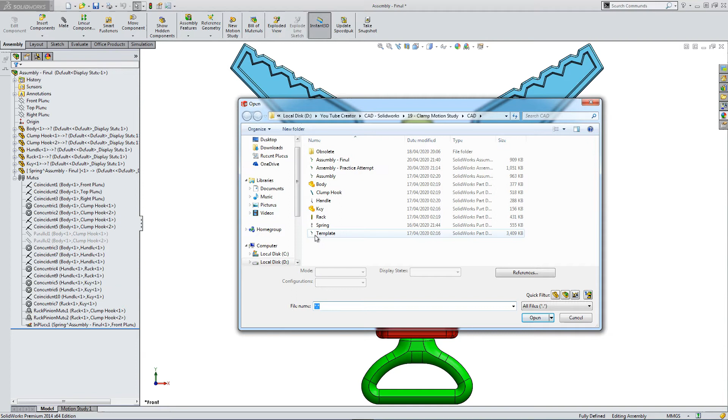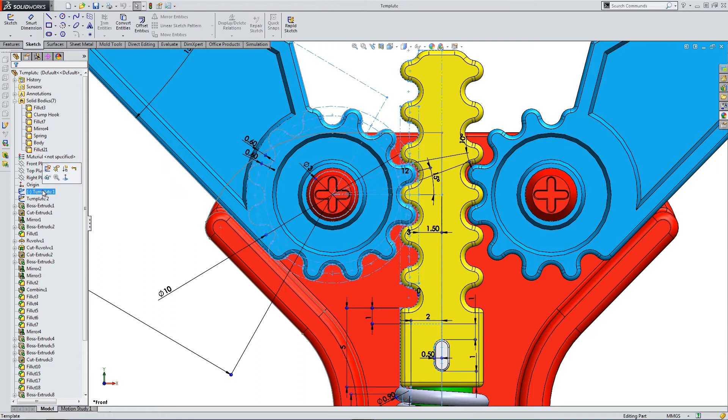So let's have a look at a master file we actually put together to model up the parts in the first place. So although this looks like an assembly, it is actually a part file full of solid bodies. Now to start the file, I put together a couple of template sketches. Now we can go straight into template sketch 1, and this is going to give us some information we need in our assembly to tell us how far to move our rack and pinion.

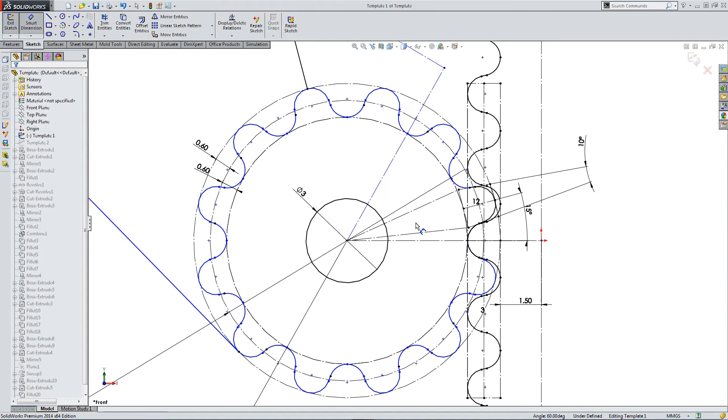So the gear is going to have to move 60 degrees, and with the 10mm diameter mid circle we're going to have to find the actual length of the arc to decide how far the rack is going to have to move. So let's just delete some geometry and let's ignore the fact that it's just going to over define it. This is okay, we're not particularly interested in that fact.

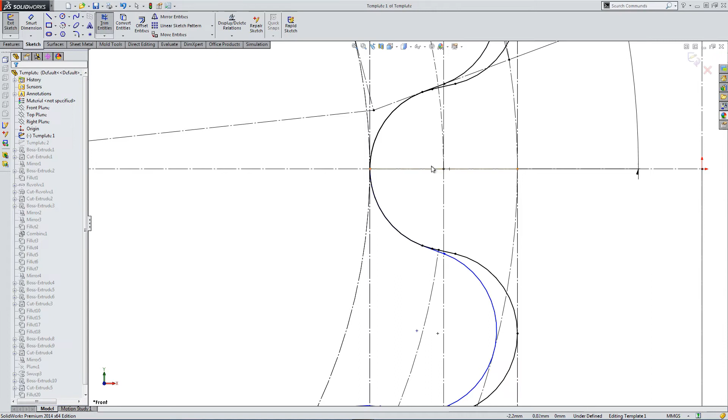So the arc that I'm interested in to tell me how far my rack is going to move, let's just go to evaluate and measure. Let's measure the length of the arc. So it confirms that the radius is 5mm, the angle is 60, and the arc length is 5.2359 millimeters. So let's copy this, and then we can come out. And that's all we wanted from our master model.

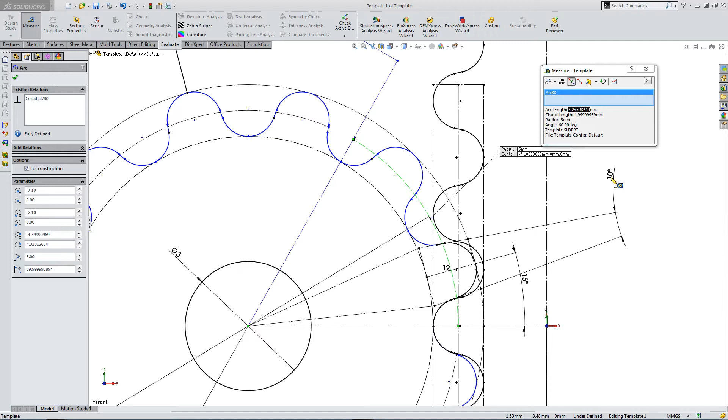Okay, so now we're back in the assembly. Actually, no, we're not. Let's close it. Okay, now we're back in our assembly of parts. So I want my rack to move by a set distance. I've just noticed that I have a mate that's still turned off. So let's just go. Yeah, let's turn the camera off because the camera angle changes can be quite annoying.

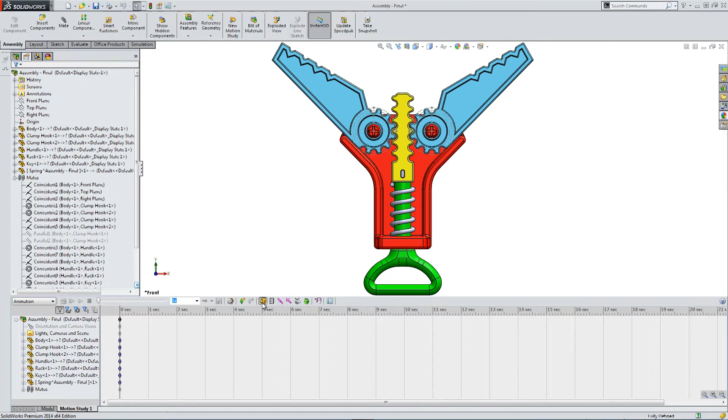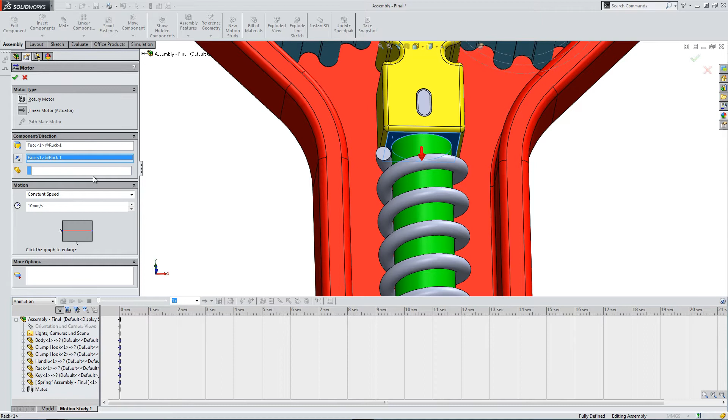So in the motor mate, I want a linear motor in my animation motion study. I'm going to pick my component. So I'm going to pick the base of this rack. And I want it to move down, but I want it to move at different sections of the animation. So I don't want to go with constant speed. I want to go with segments. So I'm going to segment when it moves down. So I have a series of positions. Let's add a row.

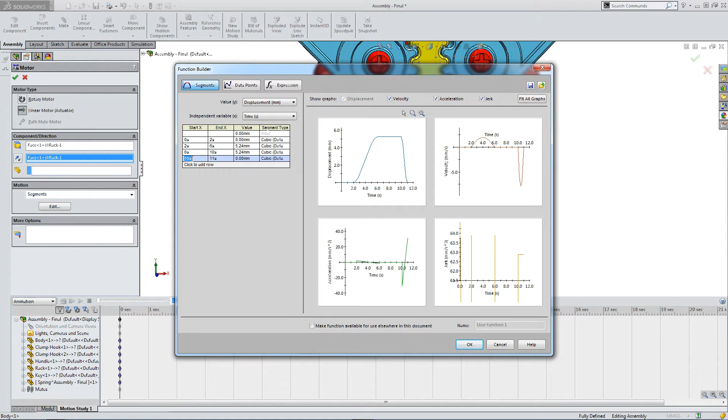So from 0 to 2 seconds, I don't want the part to move at all. Now let's add another row. Now from 2 to, let's say, 6 seconds, I want it to move, and let's go paste. So this is Control V, which will give me a paste from my model. 5.2359 we've added. Again, that's come from the master model. From 6 to 10, I want it to stay there. And then from 10 to 14 seconds, I want it to go back to its start position. So I'm going to put it back to 0.

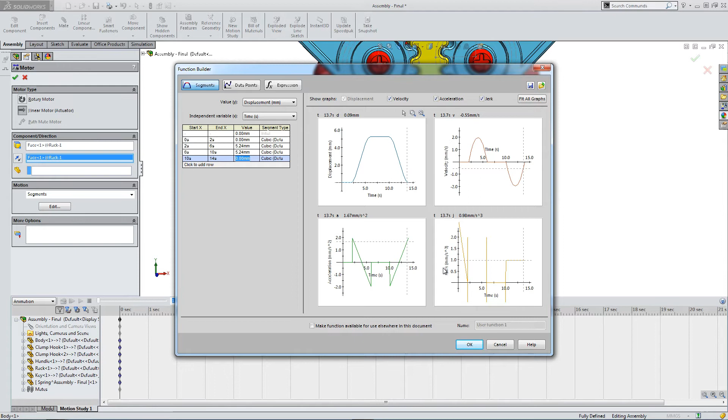So the graph showed the displacement. So there's no displacement until 2 seconds. And then it moves, and then by 14 it comes back to its start position. And the velocity, see, increasing velocity as it moves, and then at 10 seconds when it moves back, you can see a sudden increase in velocity. We also have acceleration and we've got jerk. We won't worry too much about these. So I'm happy with the motor. So I've basically set the motion for the rack.

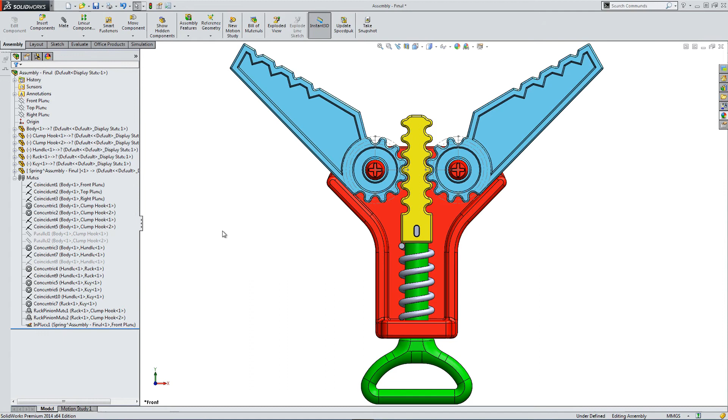I need to find this mate I was talking about earlier. So there is a mate. There you go. That's the backstop mate. So let's come out of the study and let's turn that mate off. Coincident 8. And that was just to align the geometry in a previous video. And I can see it's back on when we go back in the motion study, so let's turn it off here as well.

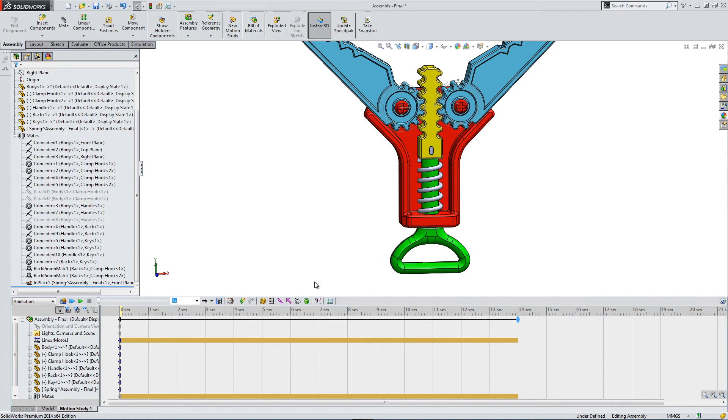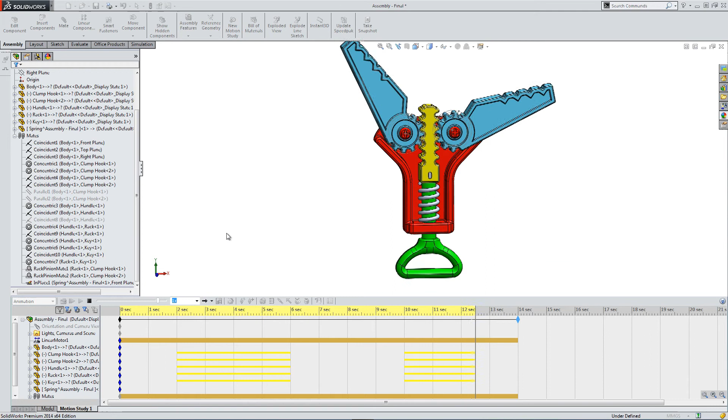Okay, so I want the timeline to be 14 seconds in line with what I've just put in for the motor. We're on animation as the type of study. Let's put in a standard view. And when we run the analysis, you can see everything's gone a little bit awry, but this was kind of expected when we put together the rack and pinion mate. So it is purely the rack and pinion mate that I need to look at.

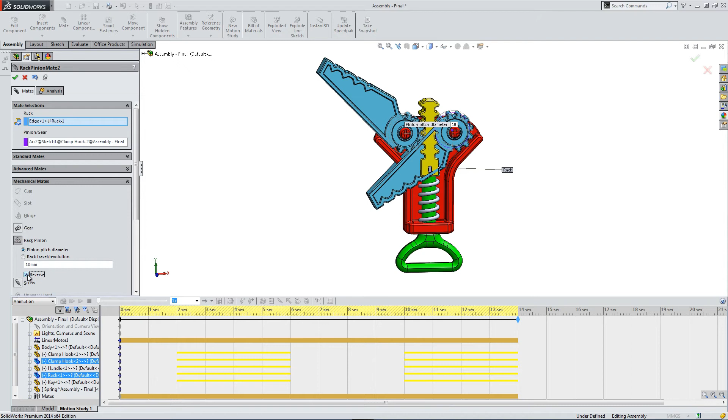So let's look at the second rack and pinion mate. Reversing it doesn't work, but selecting a different line from the rack might cure this part. So let's get rid of the edge. And let's use the same edge that we're referencing from the first rack and pinion. Let's see what that does.

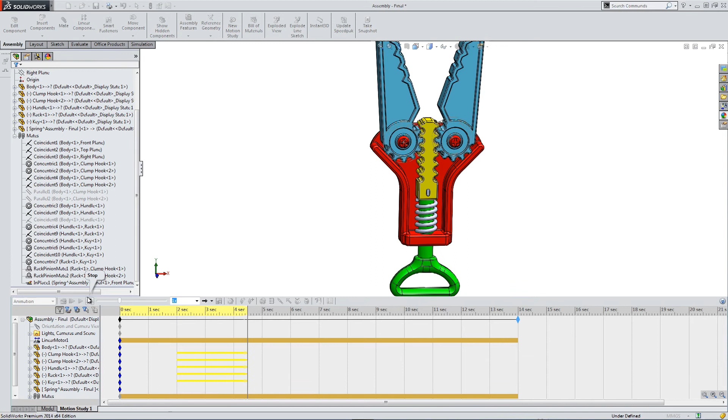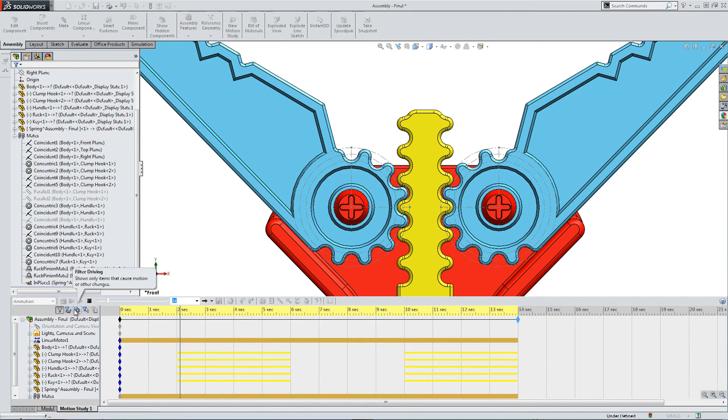So let's process the model. Looks promising, looks like everything's moving the way I want it to. 10 seconds it moves back. So between 10 and 14 it's moving back. Okay, so let's get a better view of what we've put together here. And I've got the gears and everything moving together. And then from 10 seconds moving back out. Brilliant. Okay, I think that's working for me.

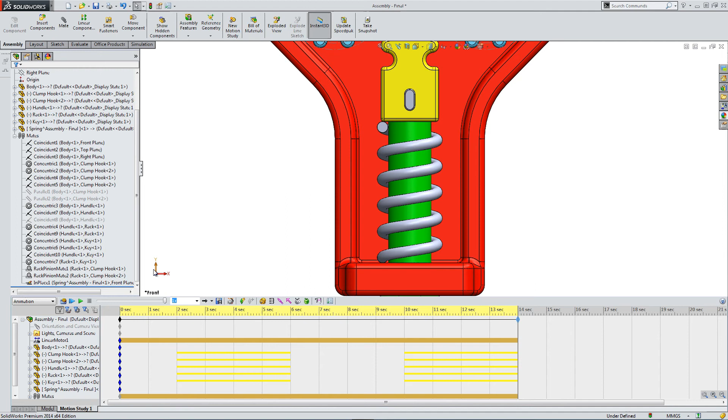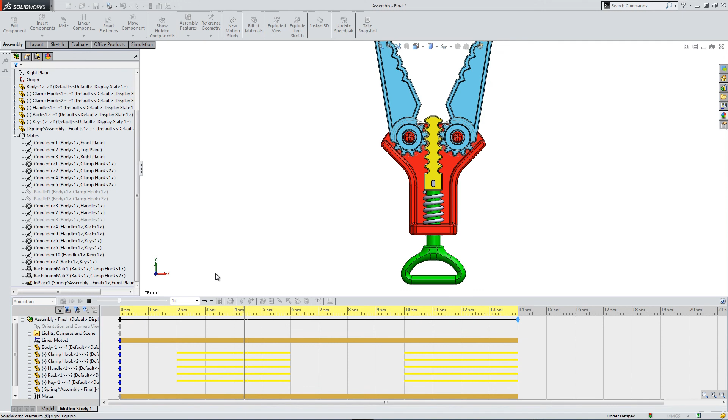And now let's have a look at the spring just to confirm this is working as intended. Okay, so the spring looks like it's working out as well. So let's have another look. Let's just run it. We can slow it down, but I'm not going to. Let's play it again all the way through just to check everything is coming together and moving as intended. No clashes. And that's it. That's how you set up and run a basic animation for a clamp mechanism with a spring.